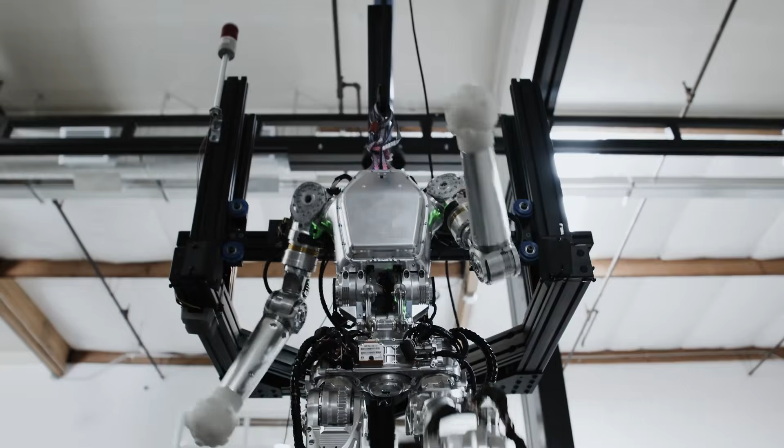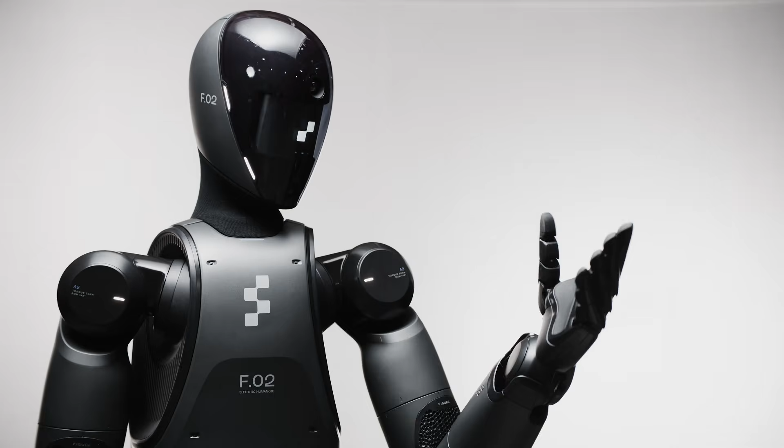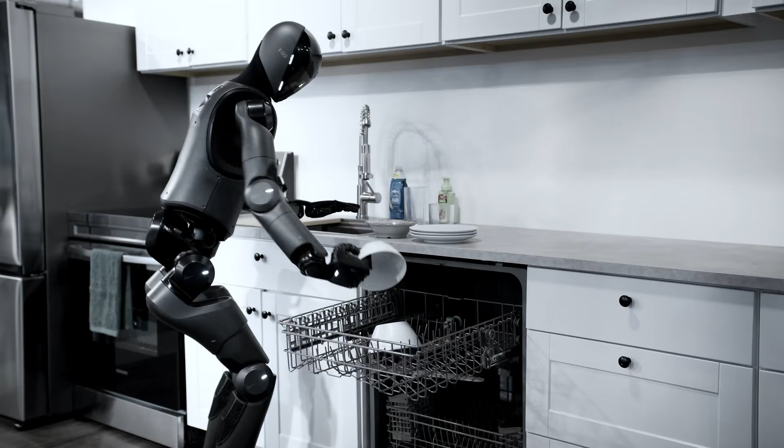And here's where things get even crazier. The company isn't just raising funds to expand slowly. They're hinting at something much bigger, with 3 back-to-back announcements lined up, one each day for the next 3 days. This raises the question everyone's whispering right now: are we finally about to see Figure 03, the robot that could mark the leap into AGI-level humanoid intelligence? And if so, is Figure about to put itself ahead of Tesla, ahead of Boston Dynamics, and ahead of every single humanoid robot company on the planet?

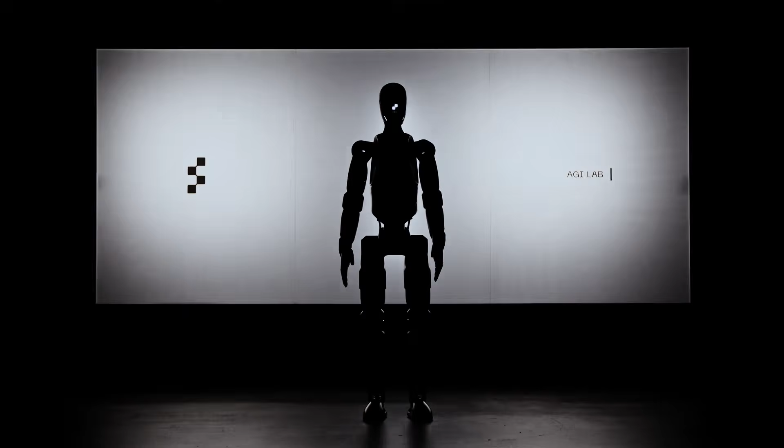NVIDIA is powering almost every AI model running today. Intel is still a cornerstone of global computing. Salesforce, T-Mobile, Qualcomm - these companies don't casually hand out checks this large. They see something in Figure that makes them believe this isn't just a robotics company. It's the company that could redefine labor, reshape economies, and maybe even spark the first true artificial general intelligence inside a humanoid body.

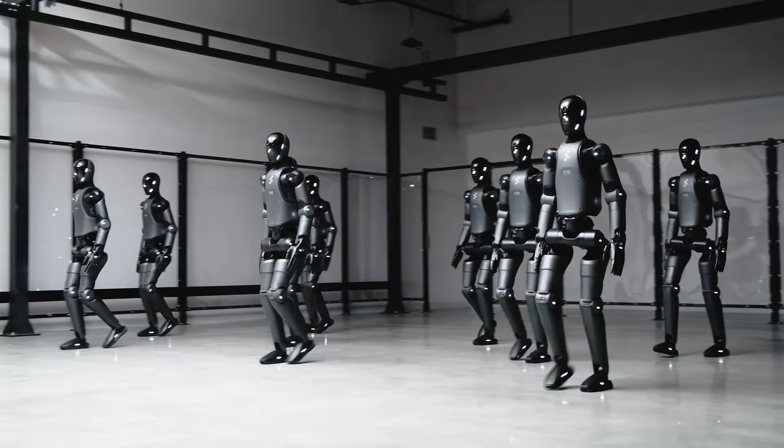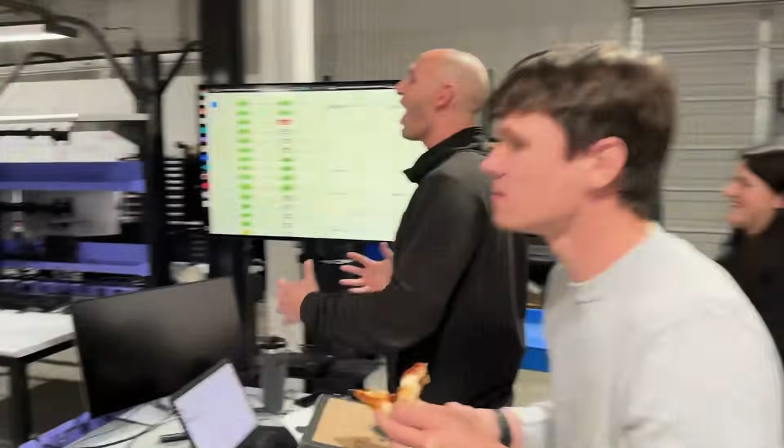And let's not forget Brookfield Asset Management, which manages hundreds of billions in assets globally. They don't invest in futuristic moonshots unless they see a real chance of return. Parkway Venture Capital leading this round makes sense because Parkway has already been one of Figure's strongest backers. But the fact that this list of partners is so diverse, from hardware giants to software leaders to telecom providers, tells you everything. Everyone wants a piece of Figure's future.

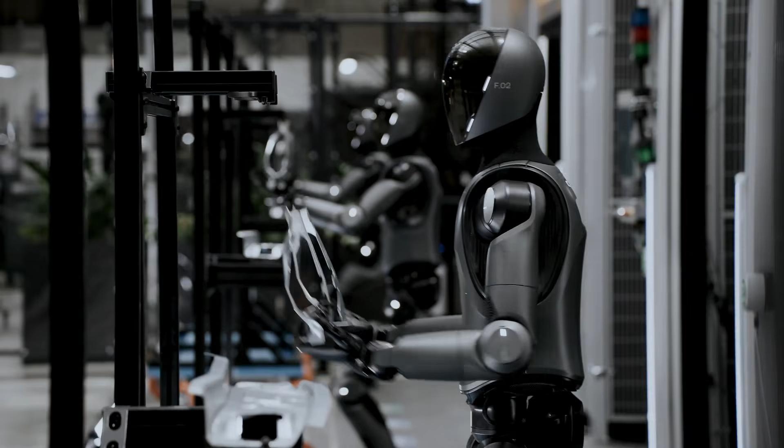At a $39 billion valuation, Figure is now one of the most valuable robotics companies in the world. And here's the wild part - they've reached this valuation before even rolling out a fully commercial product. That shows the level of anticipation around Figure 03, because let's face it, nobody invests at this level unless they think the company is right on the edge of something revolutionary.

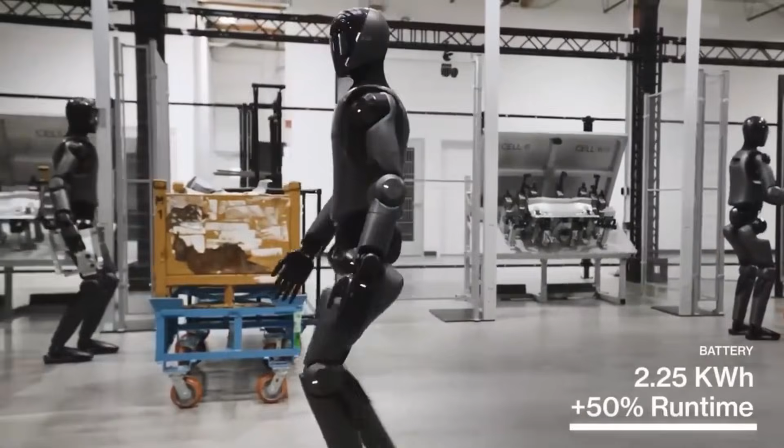Now here's the part that has the robotics industry holding its breath. Figure has 3 major announcements coming, one each day for 3 days straight. That's not a random strategy. You don't time announcements like that unless you're building momentum towards something massive. So, what could those announcements be?

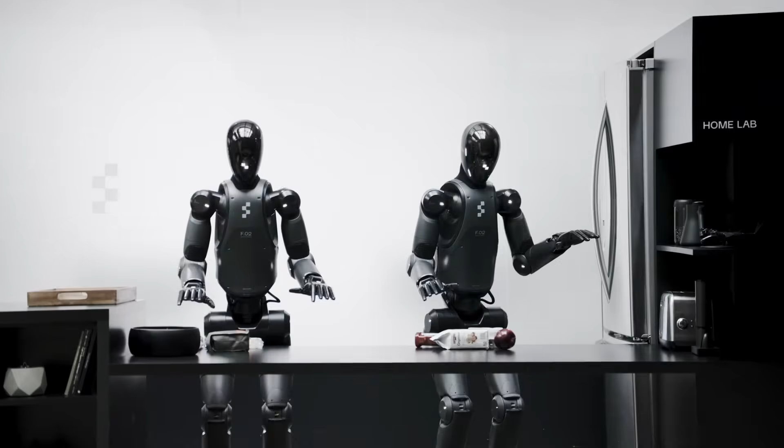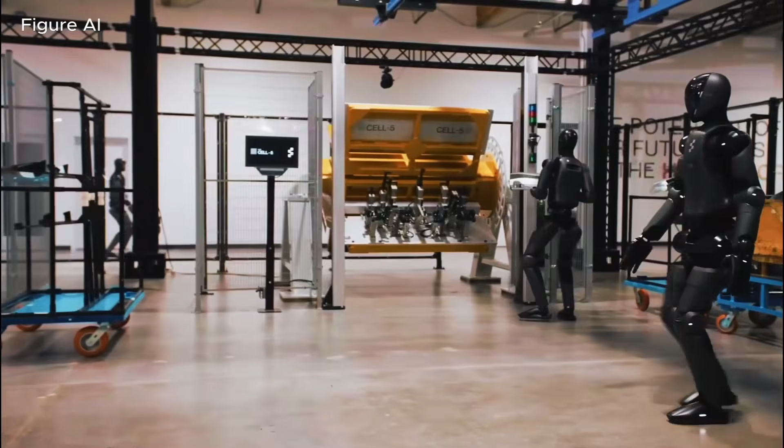The first could easily be related to partnerships. With so many companies investing - NVIDIA, Intel, Salesforce, Qualcomm - it makes sense that one of the announcements will highlight how these partnerships are being integrated into Figure's roadmap. Imagine Figure robots powered by NVIDIA GPUs running the most advanced AI models, with Intel and Qualcomm handling distributed computing and Salesforce integrating humanoids into enterprise workflows. That alone would be headline-worthy.

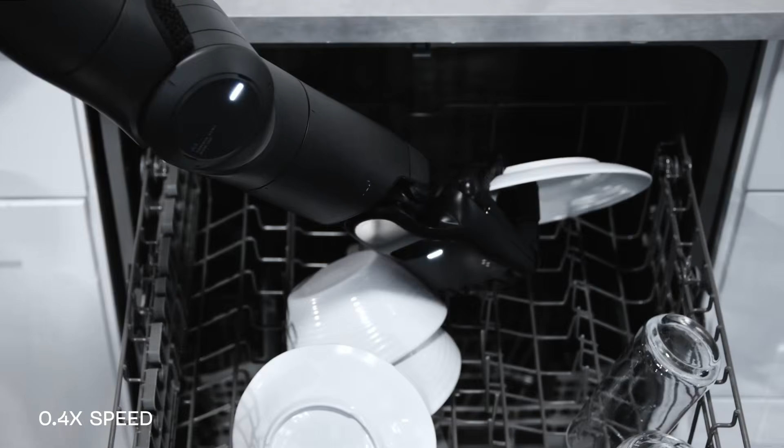The second announcement could be tied to progress on Figure 02's deployments. We've seen Figure 2 sorting packages, folding laundry, and showing dexterity that rivals human workers. Maybe they'll announce a major customer or pilot program with a global company, perhaps in logistics, manufacturing, or retail. Given the funding, this would make perfect sense - show investors and the world that the humanoid is already doing real-world work.

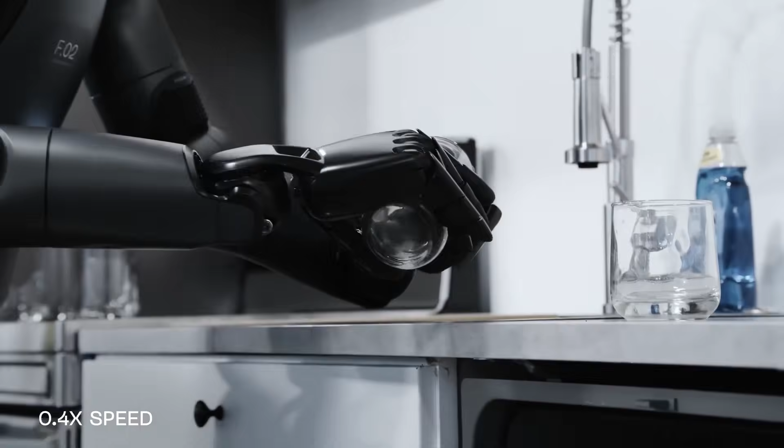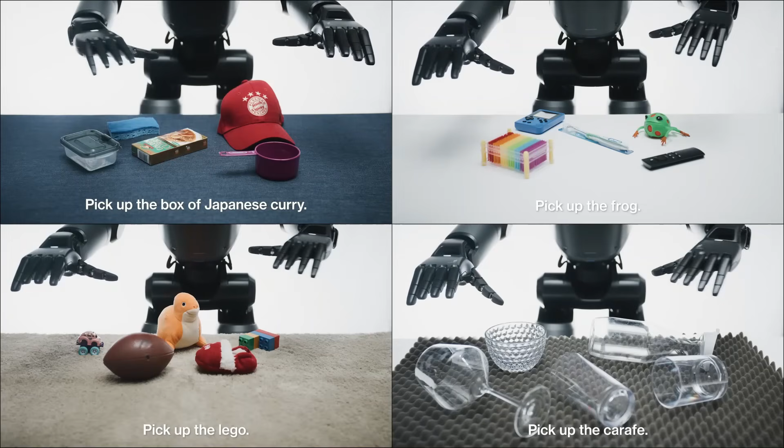But the third announcement? That's the one we need to talk about, because all signs point to Figure 03. Speculation around Figure 03 has been building for months, and now, with this billion-dollar funding round and these announcements, the timing lines up perfectly. So let's talk about what Figure 03 could actually look like.

First, it's clear that Figure 02 has already set the stage. Figure 2 uses a single neural network to handle multiple real-world tasks autonomously. That's a major leap, because most humanoid robots today still rely heavily on teleoperation or task-specific coding. Figure has shown that its robots are capable of generalization, learning new tasks without being reprogrammed.

That's the foundation of AGI. Now imagine Figure 03. What if it's not just faster, stronger, or more dexterous than Figure 02, but it's designed to scale human-level intelligence across thousands of units?

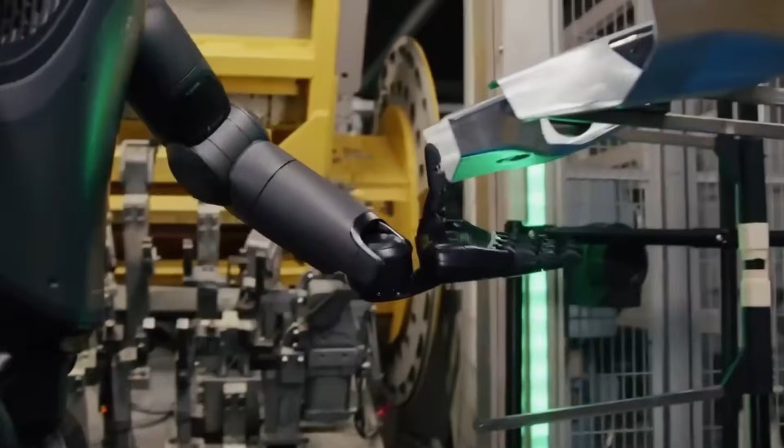Figure's own words tell us where they're aiming. They've said, 'We're full throttle to human-level intelligence.' That's not marketing fluff, that's a roadmap.

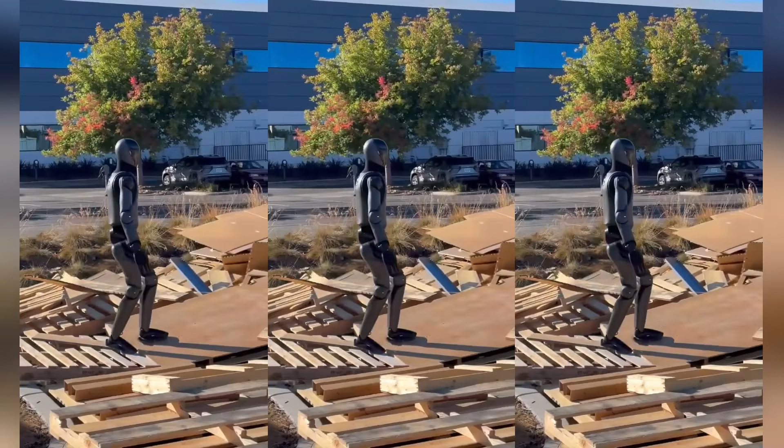If Figure 03 is announced, it could be the first humanoid built from the ground up with AGI in mind. That means a brain-like architecture that integrates perception, reasoning, and action in real time, and advanced hands capable of manipulating objects with human-level precision, plus hardware optimized to run massive AI models directly on device, with NVIDIA and Intel likely playing a huge role.

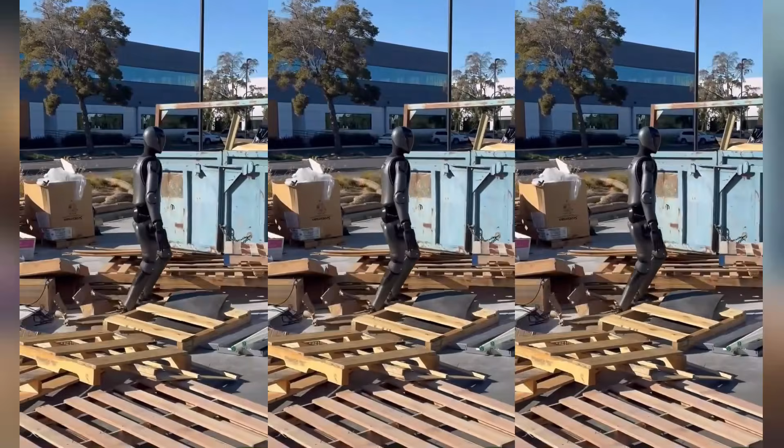Cloud integration through Salesforce and T-Mobile means Figure robots could share intelligence across networks instantly. This wouldn't just be a humanoid robot, it would be a platform for intelligence, where every single Figure robot contributes to a collective brain, making the system smarter with every task.

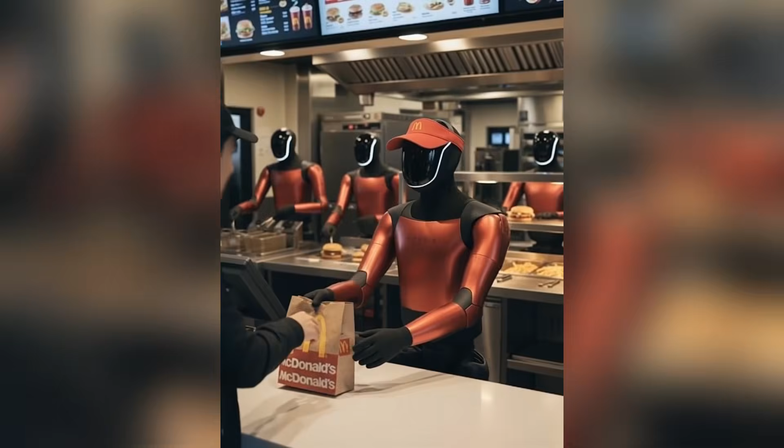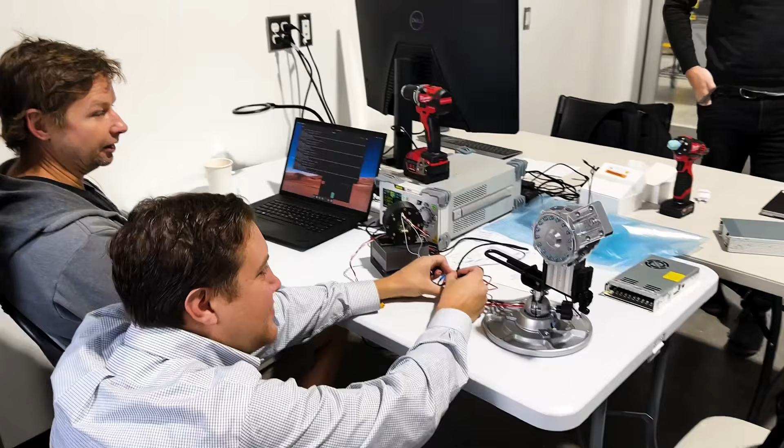The bigger question is whether Figure is now openly racing to AGI before anyone else. Tesla has made huge progress with Optimus, but Elon Musk has been cautious about calling it AGI. Boston Dynamics has world-class locomotion, but their robots are still focused on industrial and research applications. Companies like 1X, Sanctuary AI, and Unitree are pushing boundaries, but none of them are positioned with this much capital, this many strategic partnerships, and this clear of a vision for human-level intelligence.

If Figure 03 is truly aiming at AGI, then we're witnessing the beginning of the most important race in technology. Think about it. Whoever builds the first humanoid robot that can learn and reason like a human instantly becomes one of the most powerful companies on Earth. That robot wouldn't just replace labor, it could become the foundation of entirely new industries.

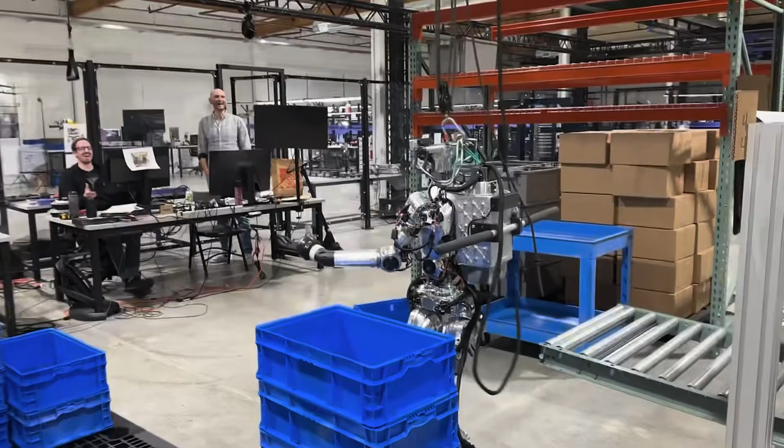And with $1 billion in fresh funding, Figure has the resources to scale at a speed we haven't seen in robotics before. Manufacturing humanoid robots is expensive. Training large-scale AI models is even more expensive.

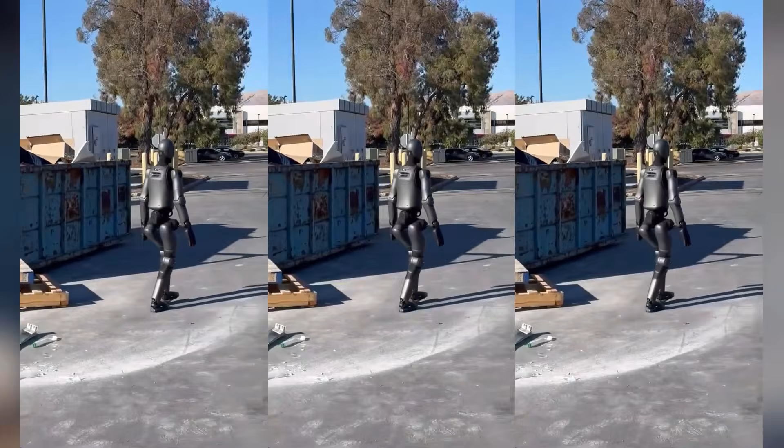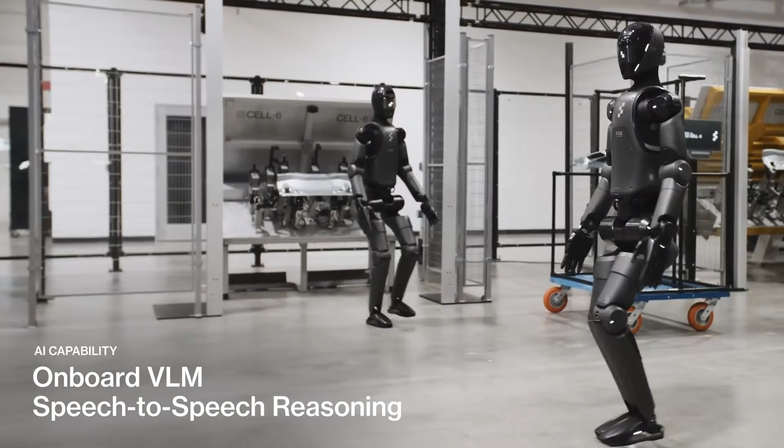But with this funding and these partnerships, Figure is positioned to do both simultaneously. A $39 billion valuation might sound like just a number, but it tells us a lot about where investors think Figure is headed. Compare that to OpenAI, which hit valuations north of $80 billion based on ChatGPT's success. Now think about combining OpenAI-level AI intelligence with a humanoid robot body.

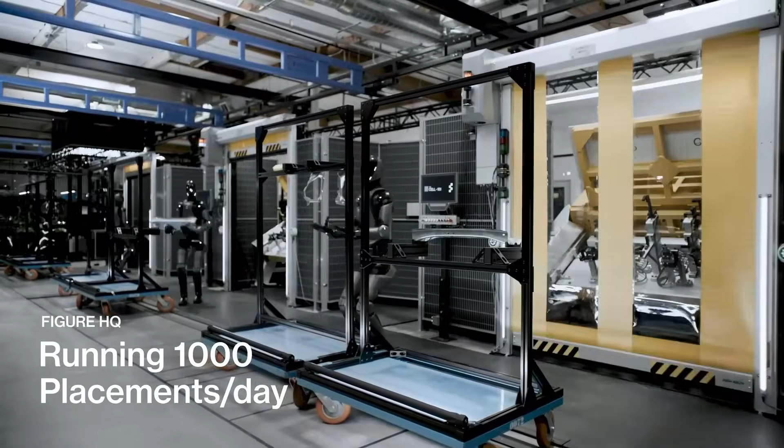That's the vision Figure is selling, and it's why investors are lining up. At this valuation, Figure is being treated not as a robotics startup, but as a future platform company, one that could rival Apple, Google, or Tesla in impact. The humanoid robot itself is just the beginning. The real value is in the intelligence, the data, and the network effects that come from deploying thousands of humanoids across industries.

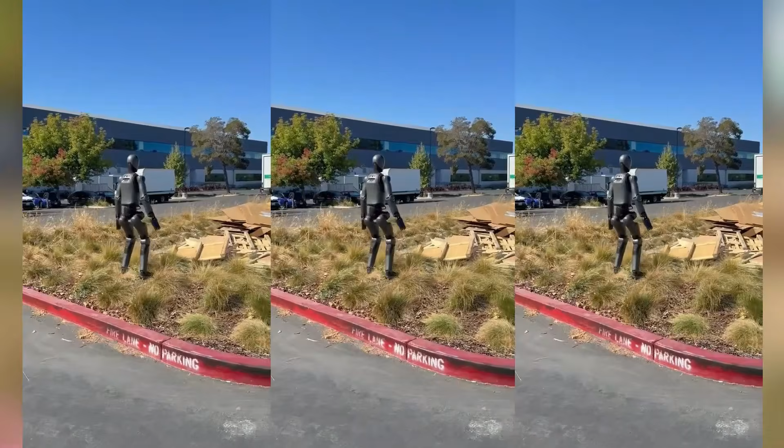But here's the big challenge. Building a humanoid that can work is one thing. Deploying thousands into real-world environments is another. That's where Figure's partnerships come into play.

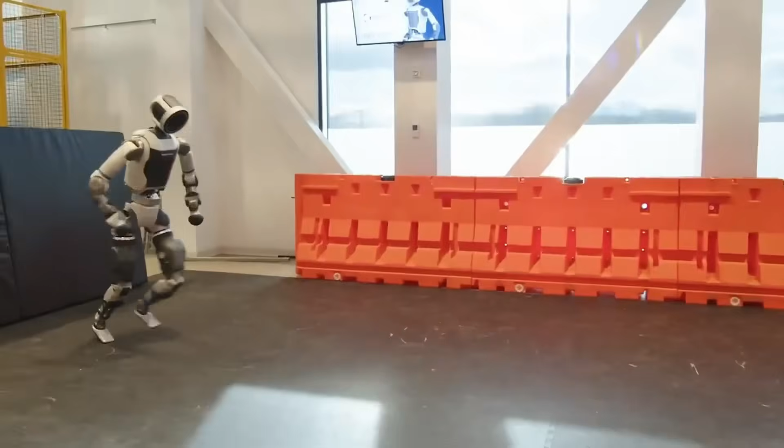With Brookfield involved, they could pilot robots in large-scale real estate and infrastructure projects. With T-Mobile, connectivity is covered. With Salesforce, humanoids could be integrated into enterprise systems to handle logistics, data entry, and customer-facing roles. And with NVIDIA and Intel, the computing backbone is solid.

This ecosystem is what sets Figure apart. They're not just building a robot, they're building an entire stack that integrates AI, hardware, cloud, and industry partnerships. That's why the $1 billion matters so much.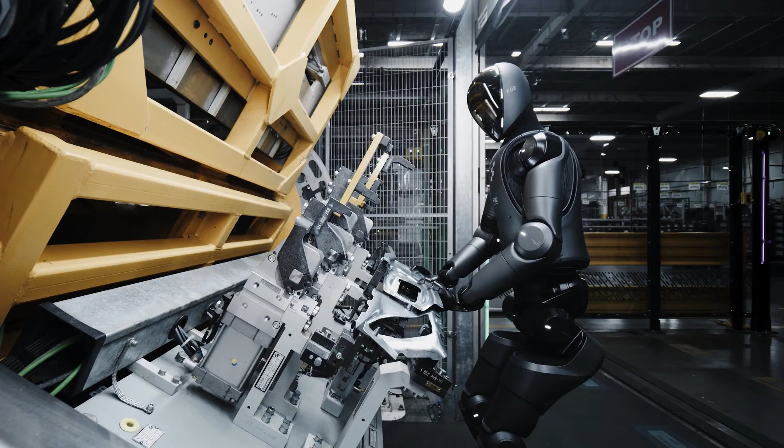So, let's answer the question directly. Is Figure 03 the first AGI robot? If Figure 03 is unveiled with capabilities beyond what Figure 02 has shown, and if those capabilities include reasoning, learning, and generalization at a human-like level, then yes, it could be the first robot to truly earn the AGI label.

Of course, AGI itself is still a debated term. Some define it as human-level intelligence across all tasks, while others say it means flexible learning across many domains. Figure seems to be targeting the latter, practical AGI that can perform a wide range of useful tasks in the physical world.

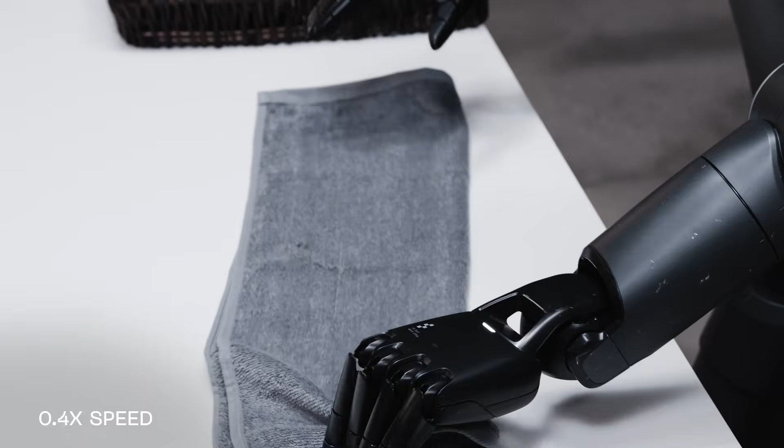And here's the kicker. Even if Figure 03 isn't full AGI yet, the trajectory they're on makes it clear that's the end game. They're not aiming for narrow AI in robots. They're aiming for intelligence that can rival human workers, and they're moving faster than anyone else.

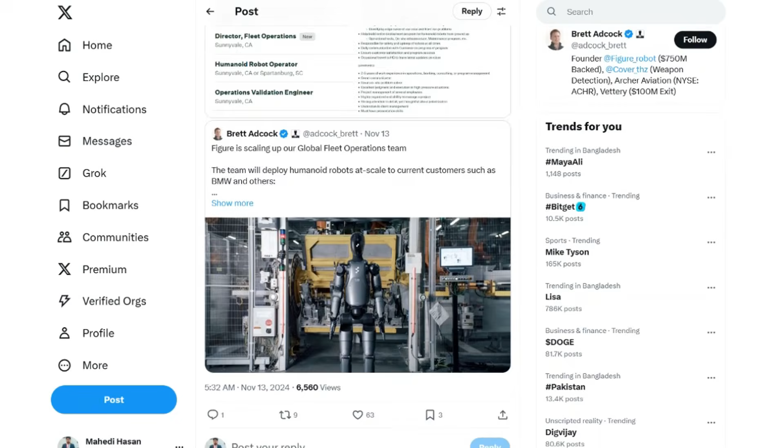The real question isn't whether Figure 03 is the first AGI robot. The real question is whether society is ready for what that means. If robots can truly think and learn like us, then everything about work, economics, and even daily life is going to change. The companies investing in Figure clearly believe that future is close, maybe closer than anyone expected. And now, with 3 days of announcements ahead, the world is about to find out just how close we are.

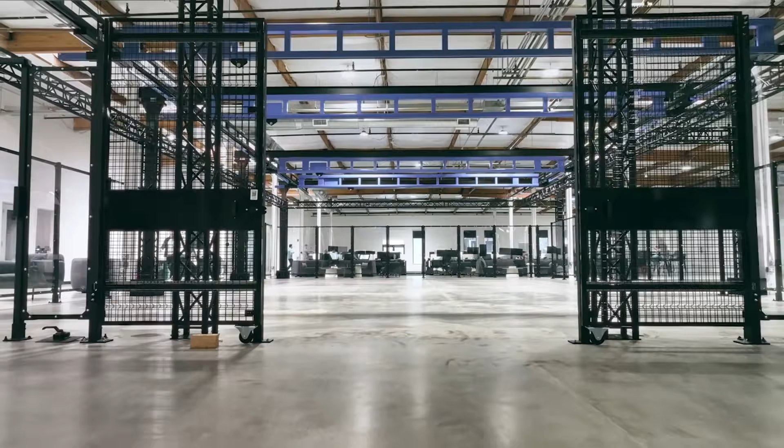So stay tuned, because whether Figure 03 is officially revealed or not, one thing is undeniable. Figure has just positioned itself at the very front of the race to AGI-powered humanoids, and the next few days could mark the start of a whole new chapter in human history.

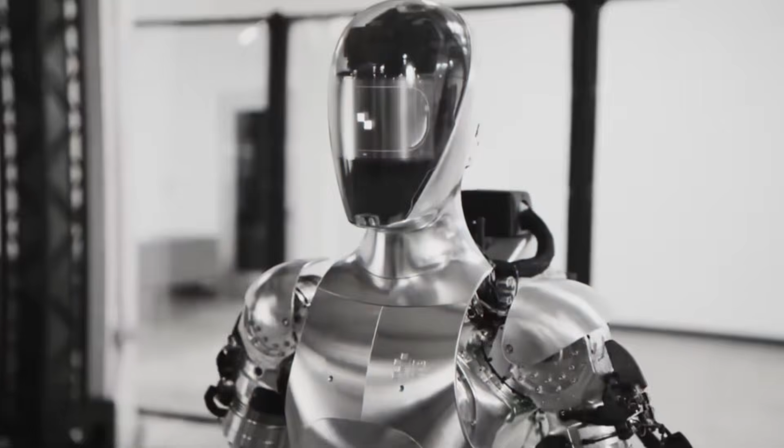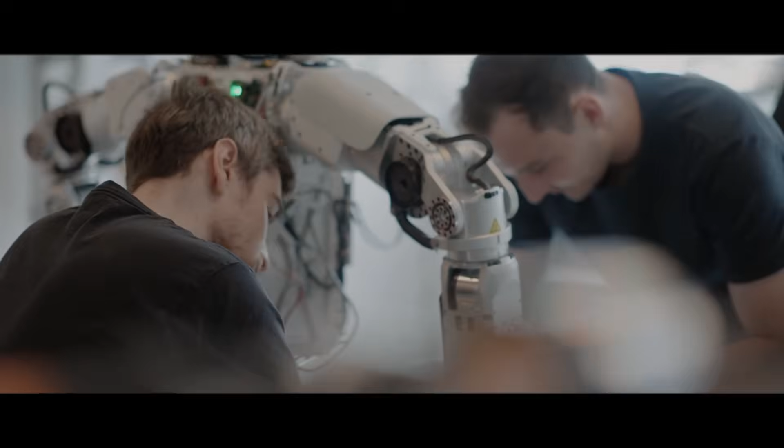New footage and announcements from the UK and China are shaking up the humanoid robotics industry right now. A British startup called Humanoid is preparing to unveil its very first robot, the HMND-01, on September 18th. At the same time, Fourier Intelligence has dropped jaw-dropping new clips of its N1 humanoid robot pulling off acrobatics like side flips and cartwheels that most humans would struggle to land.

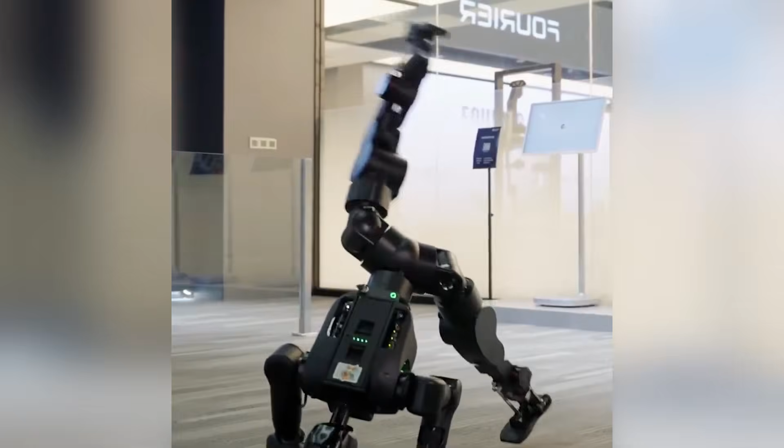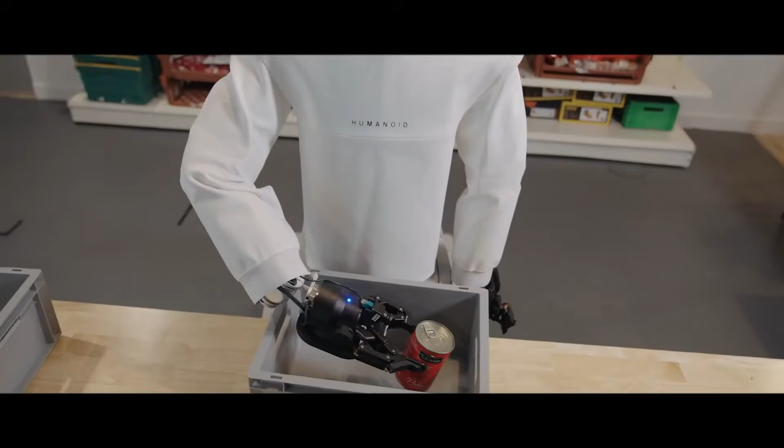These aren't small updates. Together, they highlight two very different but equally important directions in humanoid robotics: one focused on practical industry applications and logistics, and the other on pushing the absolute limits of motion, agility, and what humanoid machines can physically achieve.

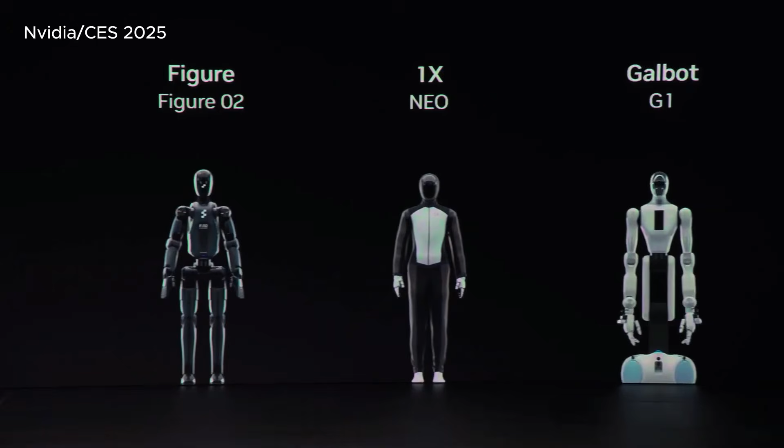Let's start with the UK's brand new humanoid robot, the HMND-01. Until now, most of the big players in humanoid robotics have been concentrated in the US, Japan, and China. We've been talking about Tesla Optimus in California, Figure 02 in Sunnyvale, Agility Robotics in Oregon, Unitree and Fourier in China, and Toyota and Honda over in Japan.

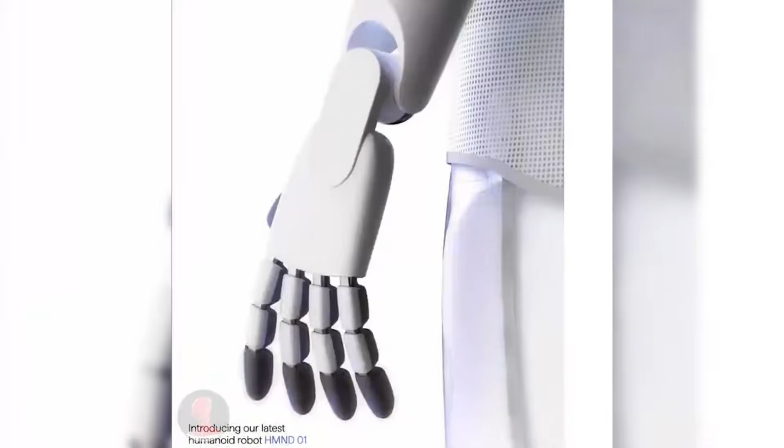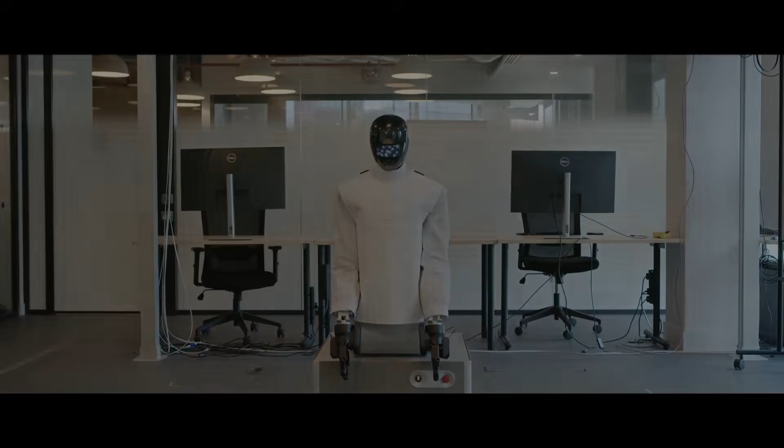But now the UK is stepping up in a serious way. The startup behind this new humanoid is called Humanoid, and they've been building up a lot of buzz over the last several months. Back in June, they showed off a prototype, just enough to tease the shape of what they're building. But now, the company is gearing up for the full reveal of HMND-01 on September 18th, and the specs we already know are raising eyebrows.

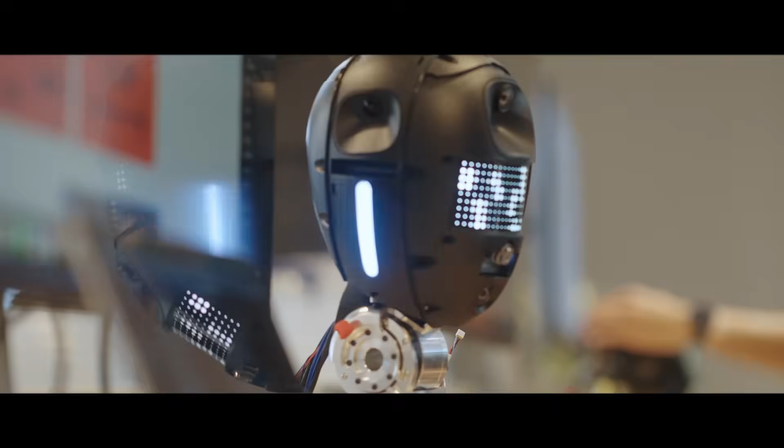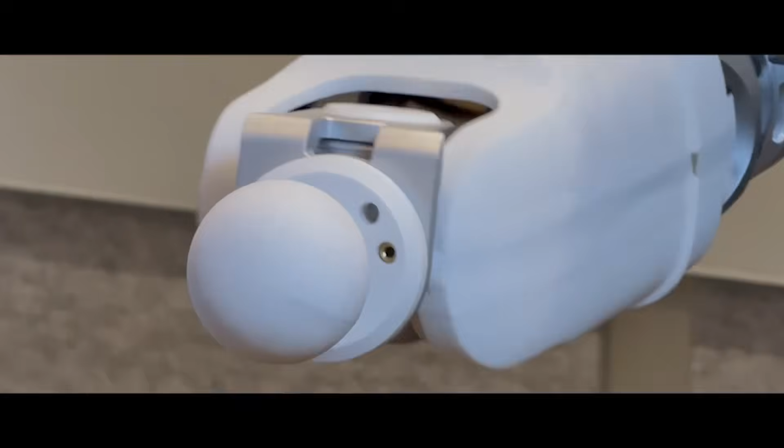According to the company, the robot is designed around a wheeled chassis, but with a foldable, elevating body. That means it can drop down for stable wheeled movement, perfect for warehouses and industrial logistics, but also extend upward into a full humanoid form for tasks that require reach or more human-like interaction.

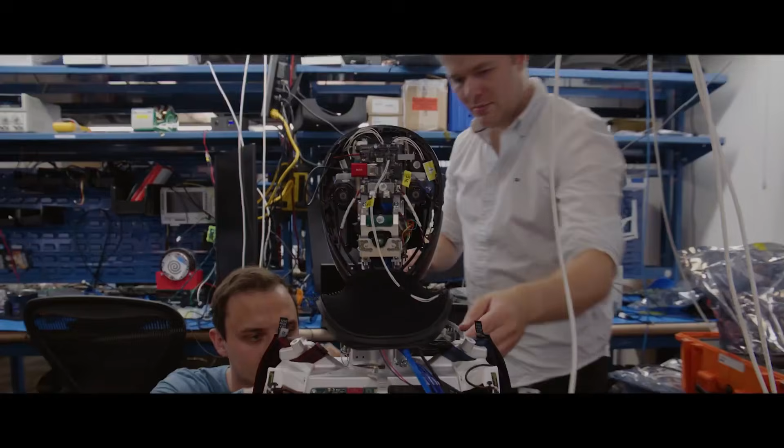Now let's put this into perspective. At 5 feet 9 inches, the HMND-01 is right around the average human height, which means it's designed to fit into environments made for people. The weight is surprisingly low for a humanoid of this size. Tesla's Optimus, for example, is over 160 pounds, and Figure's robot is even heavier. That lighter frame could give the HMND-01 an edge in energy efficiency and maneuverability.

The 41 degrees of freedom is also notable. That's the number of joints and actuators the robot has to move like a human. More degrees of freedom usually mean more flexibility and dexterity, and 41 is right in the competitive range for serious humanoid development.

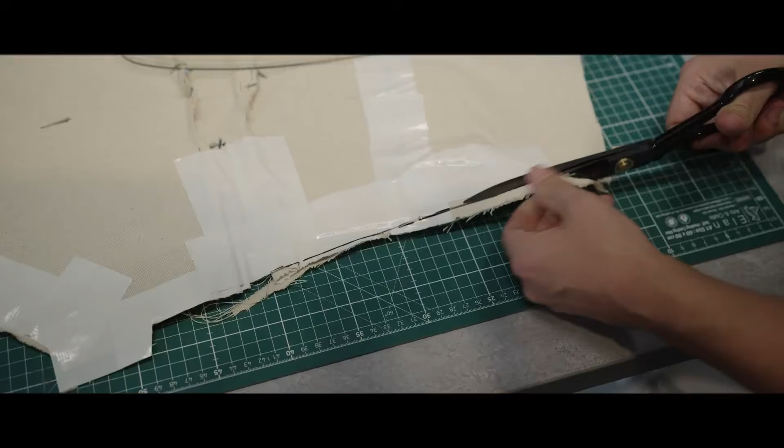What's almost more shocking than the specs is the timeline. The Humanoid AI has been working on this robot with a team of over 175 professionals, and they've only been at it for about 7 months. That's a blistering pace in robotics.

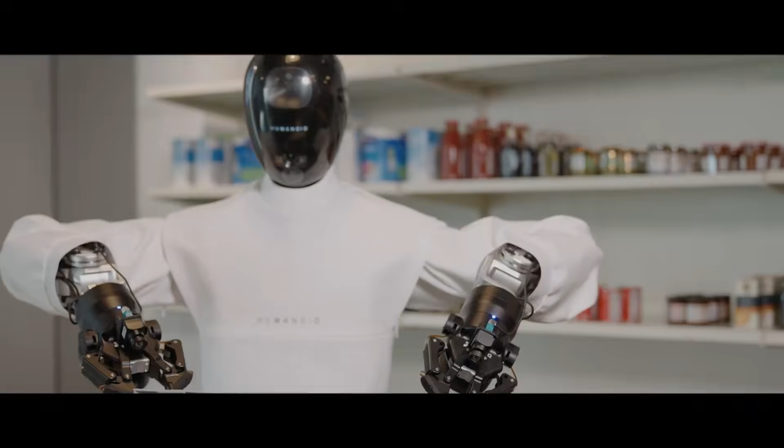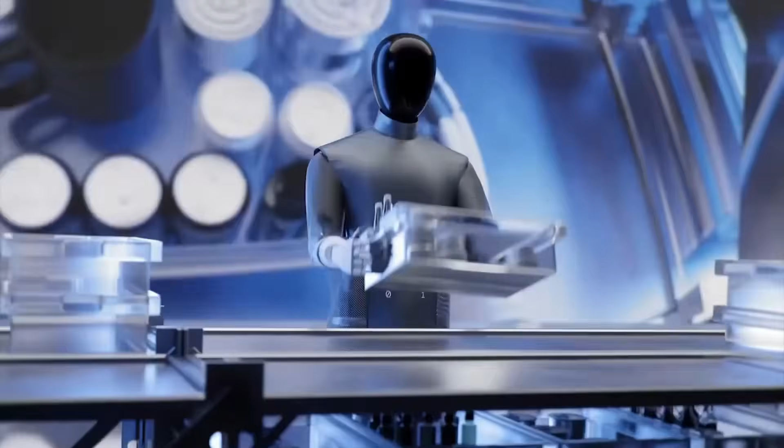Companies like Tesla, Agility, and Boston Dynamics have been developing their humanoids for years, if not decades. For a UK startup to go from concept to a working alpha prototype in just 7 months shows not only ambition, but also a potential shift in how fast these machines can actually be developed when the right talent and funding are in place. And they're not being shy about it.

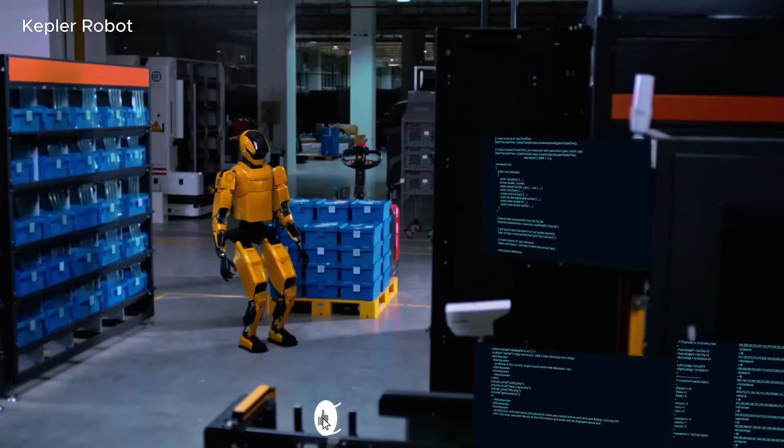Their announcement literally says, 'One bold vision. 175 plus professionals. 7 months. A robot that could change the world. Our alpha is coming September 18th.' That's confidence. And it makes sense why.

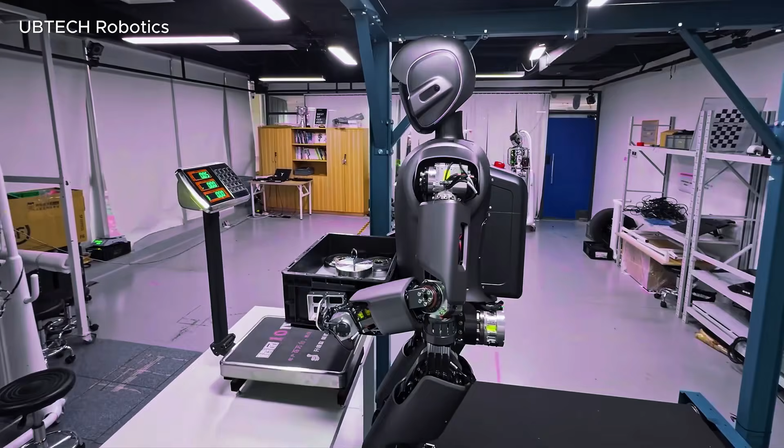The market for humanoid robots is heating up faster than anyone expected. Tesla is racing to bring Optimus into factories. Figure has a major deal with BMW. Agility's Digit is already working in warehouses. Chinese companies like Unitree and Fourier are rapidly iterating on their designs. If the humanoid AI can pull this off, the UK could suddenly become a serious player in this global race.

So, what's the real play here? Based on everything we know, the HMND-01 isn't being designed to do backflips or show off crazy acrobatics. Instead, it's about functionality in industry and logistics. The wheeled base is a big clue.

Walking robots are impressive, but they're still less energy efficient than wheels, and wheels are often more practical for flat industrial environments like warehouses, shipping centers, or factories. The foldable, elevating body design could allow the robot to quickly shift between efficient travel and more humanoid interaction.

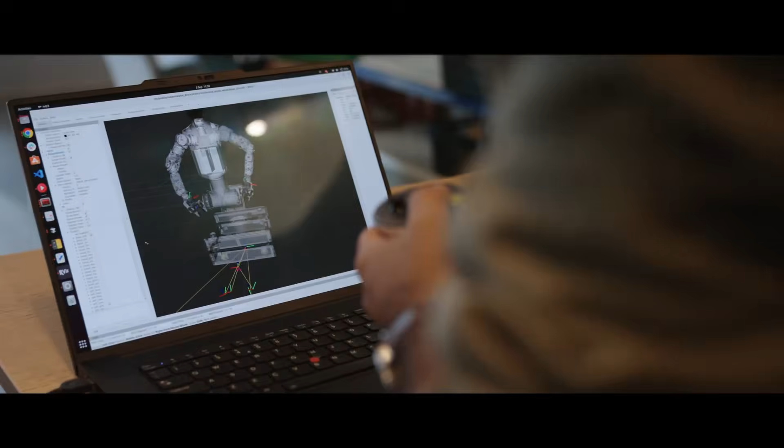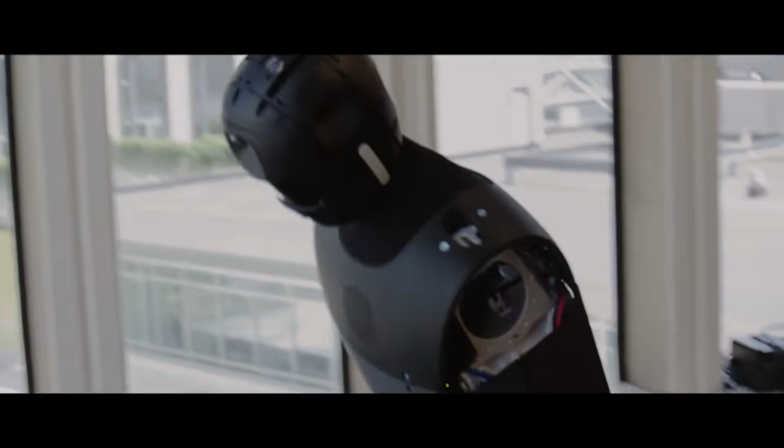Imagine it wheeling around a warehouse floor to pick up a box, then elevating upward to place it on a high shelf. The 15-kilogram payload isn't massive, but it's enough to handle a lot of smaller logistics tasks. If you think about e-commerce warehouses, grocery distribution centers, or hospital supply chains, a robot like this could move items, restock shelves, or deliver materials. It's not replacing heavy machinery, but it doesn't need to. It's filling in the middle ground, where flexibility, dexterity, and autonomy matter just as much as raw strength.

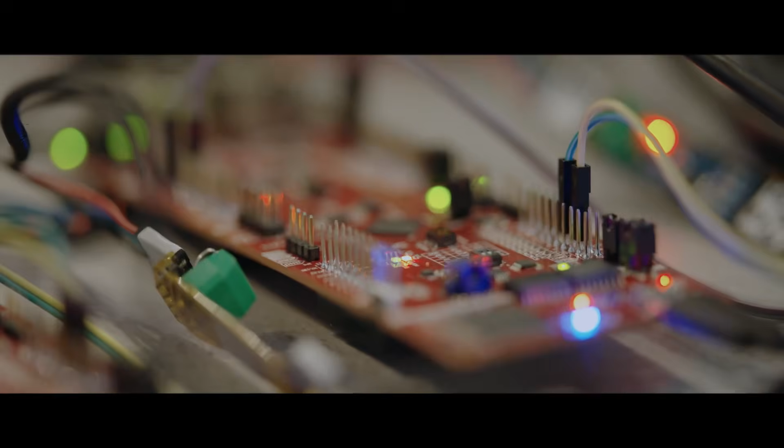And remember, this is just the alpha version. The humanoid AI is making it clear that this is the beginning, not the end. If they can prove the concept now, future iterations could scale up payload, runtime, and capability.

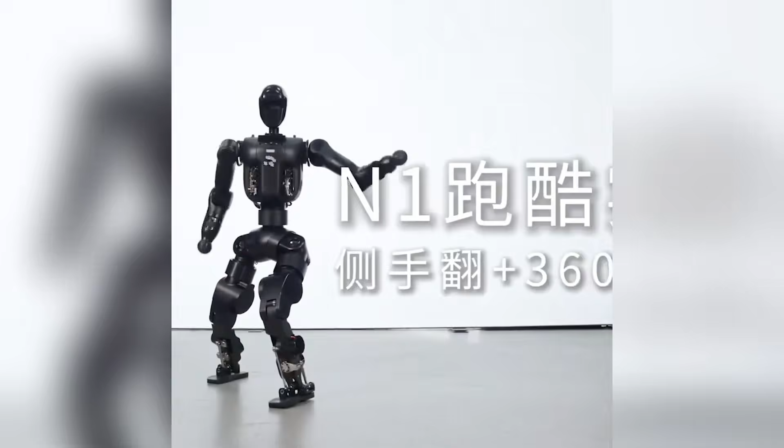While the UK is preparing for its big industrial humanoid reveal, China's Fourier Intelligence just dropped something that looks straight out of an action movie. Their N1 humanoid robot is back, and this time it's performing side flips, cartwheels, and 360-degree spins, with precision that's honestly shocking. We've seen robots do backflips before. Boston Dynamics' Atlas is famous for it. But what Fourier is showing with the N1 feels smoother, cleaner, and maybe even more stable than what we've seen in the past. The side flip in particular is impressive because it requires perfect timing, balance, and force distribution across the body. Then the cartwheel flows right after, and the robot lands with a posture that looks like it's ready for more.

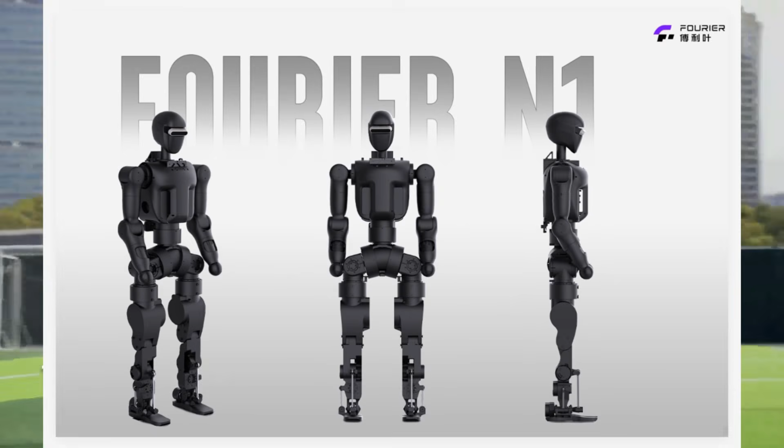This isn't just about showing off. Acrobatics are one of the hardest things a humanoid can do because they push every system to its limit. The actuators have to fire with incredible precision. The balance algorithms have to adjust mid-air, and the landing has to be perfect. Any mistake could send the robot crashing down. The fact that the N1 can pull this off suggests Fourier has massively upgraded its motion control and actuator technology. It's proof that humanoids can go beyond just walking and picking things up. They can achieve truly human-level athleticism.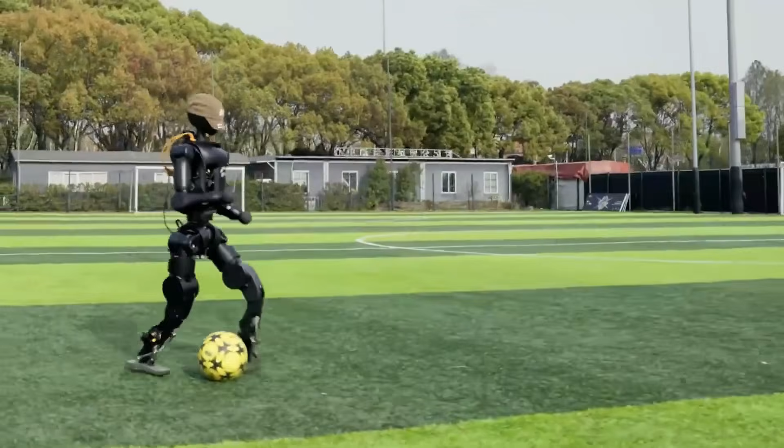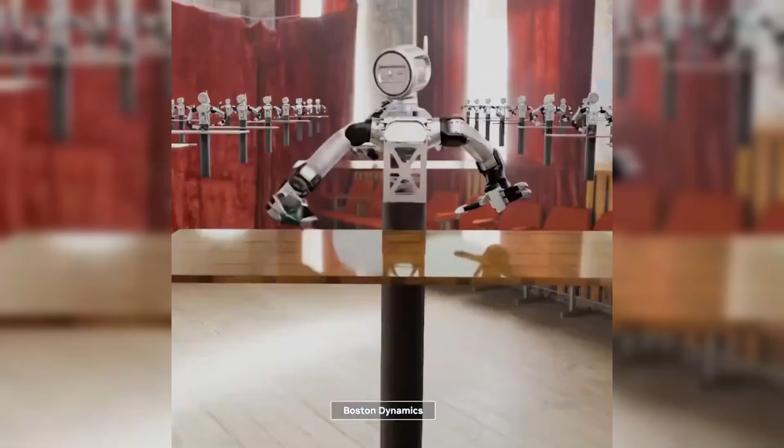What's fascinating here is the contrast. The humanoid AI is focusing on practicality with wheels, payloads, and industrial use cases. Fourier is going all in on motion capability, agility, and athletic display. And both paths matter. The practical path is how humanoids will enter the workforce. Companies want reliability, safety, and cost efficiency. A robot that can work in a warehouse for 4 hours straight, carry boxes, and integrate smoothly into logistics makes a real business case.

That's how humanoids will first scale up and become useful. The athletic path, though, shows what humanoids can ultimately become. If a robot can do flips, it means it can handle unexpected situations, adapt to rough terrain, and recover from imbalance in ways early robots simply couldn't. Acrobatics today might look like a stunt, but tomorrow it could mean a rescue robot climbing over debris, or a service robot quickly adapting to unpredictable environments. In short, HMN-D01 is about utility, and N1 is about potential.

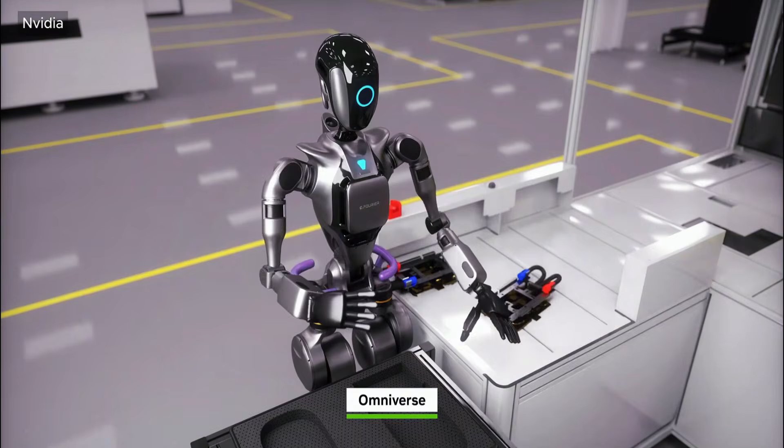The timing of these two updates is critical. We're at a point in 2025 where humanoid robots are transitioning from lab projects into real products. Investors are pouring money in, companies are racing to deploy, and every country wants to be seen as a leader in the space. For the UK, the launch of HMN-D01 is more than just one company's project. It's a chance to put the nation on the map in humanoid robotics. If the humanoid AI can deliver even a fraction of what they're promising, it will be a huge statement.

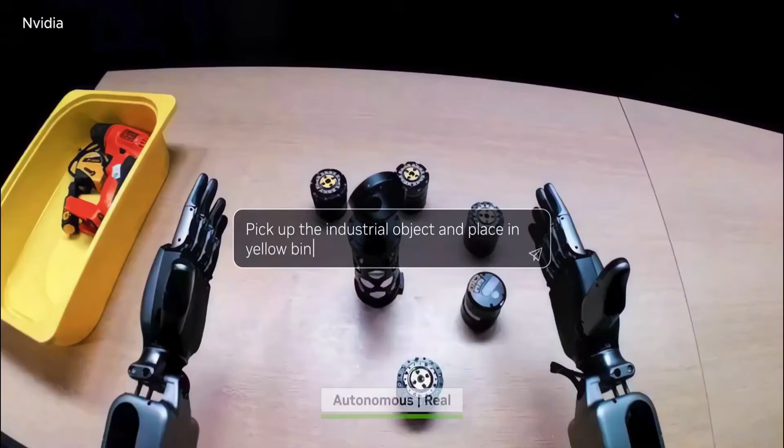For China, Fourier's acrobatics show that their robots aren't just cheap alternatives. They're technologically advanced, pushing the boundaries of what humanoids can do physically. This sends a signal to the world. China is not just catching up, it's competing at the highest level.

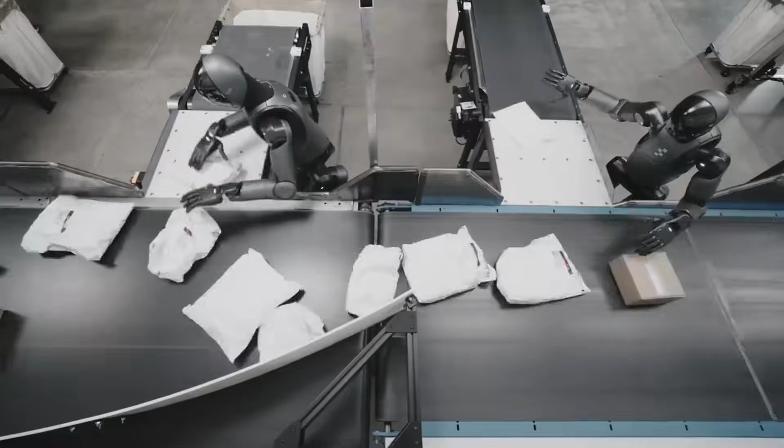Think about where this leaves us. Tesla is still building Optimus in California, and Elon Musk is promising mass production. Figure AI just showed its robot autonomously sorting packages with a single neural network. Agility's Digit is working with Amazon. Unitree is about to unveil its G2 humanoid. Now the UK joins the game with HMN-D01, and Fourier pushes athleticism to new heights with the N1. This is starting to look less like scattered projects and more like a true global race.

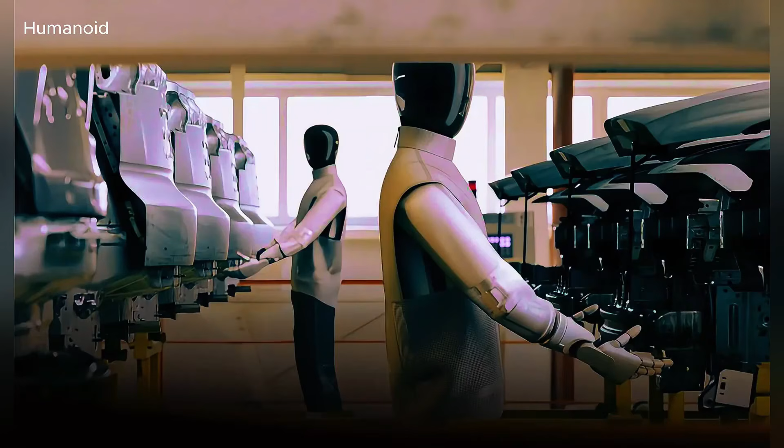And in this race, every new reveal changes the game. The fact that we're even discussing a robot that can flip through the air and a brand new UK humanoid designed in just 7 months shows how fast this industry is accelerating. The future of humanoid robots isn't coming in decades. It's happening right now.